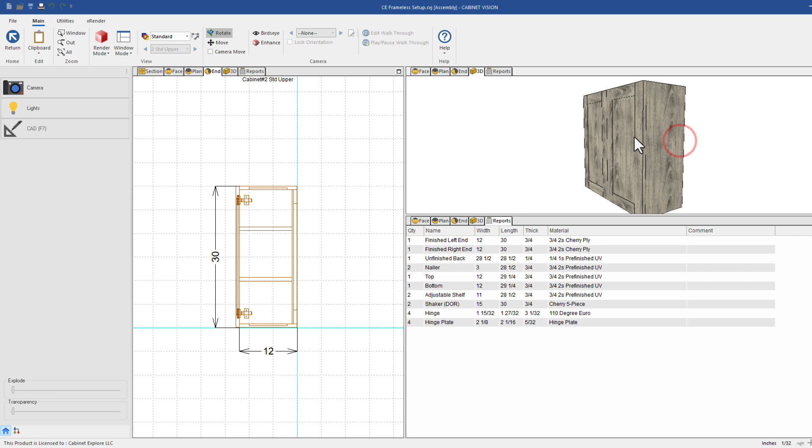Okay, in this video we're going to talk about line boring. I think this deserves a dedicated video because there's a couple different schools of thought on this, primarily two main options that people do. The first one is called bore by opening, and the second one is called bore required holes, basically like putting 5 holes per shelf instead of the full run of holes. So with what we've set up so far, we actually don't even have shelf holes yet. I want to show you how to set up the two options and show you the difference, so you can decide which way to start with.

So I'm going to do bore by opening first. Just like all the last couple videos, I'm going to go to room, cabinet, and modify for this room. This time I'm going to go to the operations tab. There's not a whole lot in here, but line boring is one thing we need to do. Right now it's set on no boring holes, which is not what we want, so let's do bore by opening first.

Bore by opening and bore all are very similar. Most times when people want full runs, they use bore by opening, not bore all. And like I said, bore required is where you pick a certain number of holes per shelf.

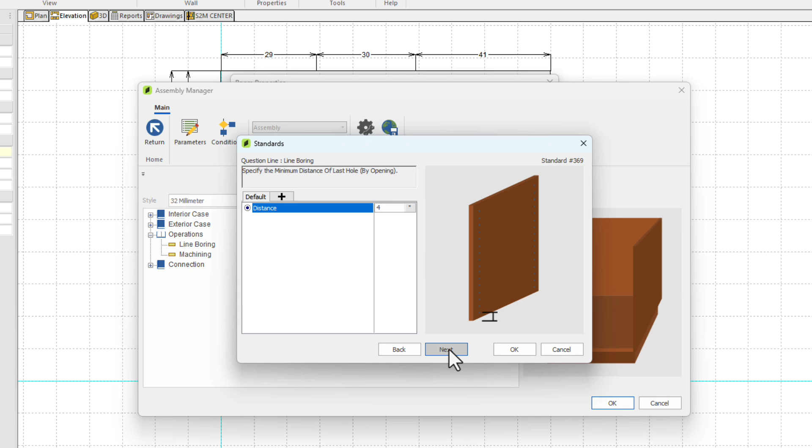So let's do bore by opening, and it's going to ask us a couple questions. Do we want to reference from the top or the bottom? I want to come from the bottom. Let's say I want 4 inches off the bottom, and minimum distance of last hole, let's just do 4 inches there too. You can equalize the distance, but I want it to be exactly 4 on the bottom. Fine, I'm just making some decisions as I go. Obviously you can make it whatever you need.

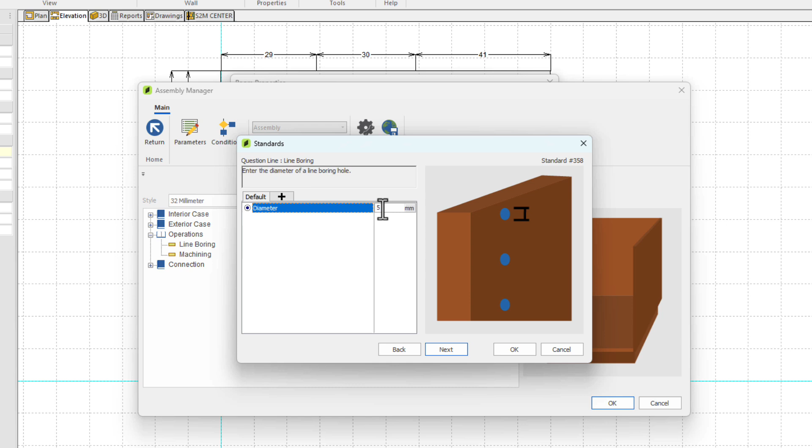Okay, diameter of the boring hole. Now I want to be careful here because I know this is 5 millimeters, but if I type that in, I'm in inches right now, and I can't click down here. So in the construction wizard, you'll see this little button that lets you swap between inches and millimeters. So I'll put 5 there. Now if I go back to inches, you see it converts it. You gotta be careful with the rounding, but if you type in 5 millimeters in this view, it's going to be perfect. The only reason it showed the rounded version is because of my setting. So we switch to millimeters, type in 5, and we're good to go.

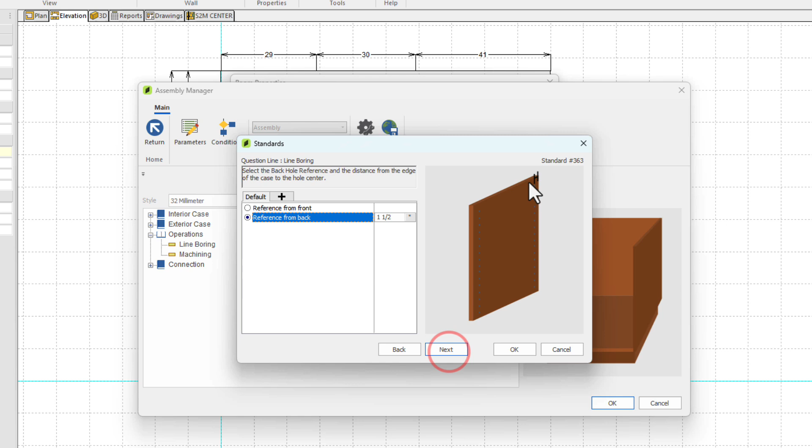On the depth, same thing, I'm gonna switch to millimeters and go 10. Now we got from the front, and then the next question will be from the back. I'm just gonna do 1.5 inches from the front. Be careful with this question because you don't want to reference them both from the front, or most people don't. You'd want to reference the front line of holes from the front, and the back line of holes would come from the back. There might be some situations where that's different, but for most people, reference the first line from the front and the back line from the back. I'm just going to make them the same. Then spacing, I'm going to go 32 millimeters. I'm not going to spend time on the middle holes, but you can see those questions there.

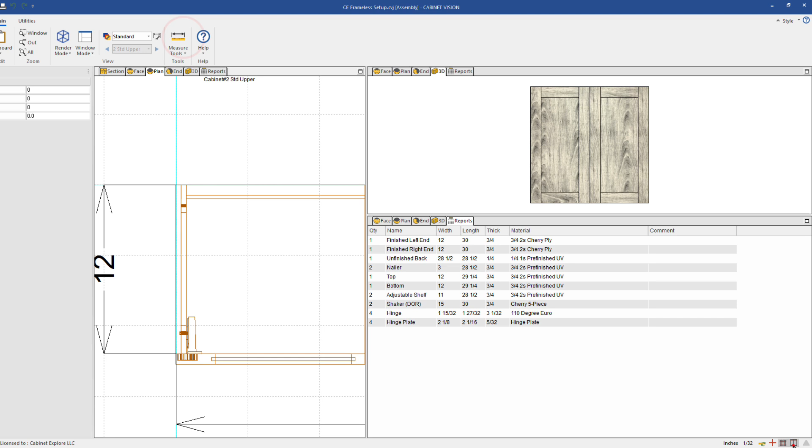Okay, so now we have our line of holes, and you can see that my 1.5 inch question is actually referring to the finished end. So I kind of wish it would be from the inside of the back, but you just have to compensate for that. Really, because my nailer and back combined are 1 inch, really I should have made the back distance like 2.5, which I'll just go do that real quick, just to show you the difference there. So we'll fly to that last question and go 2.5.

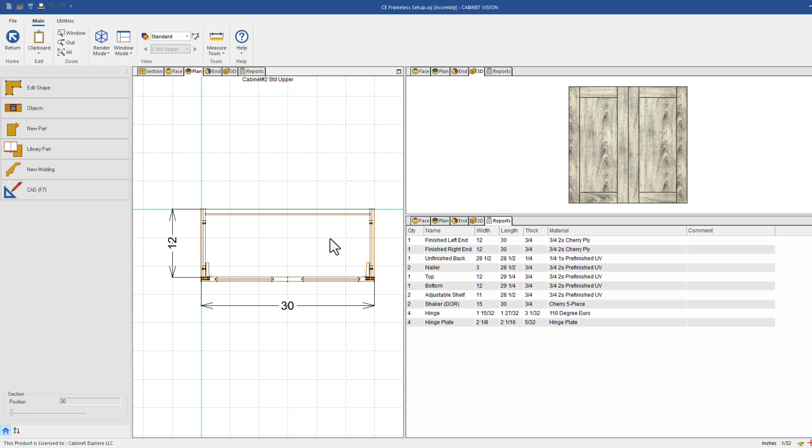You can also customize those settings at the cabinet level. For example, if you remove the back, you also have access to the boring section inside of the cabinet, and you can move the front and back setback. I know we're talking just global settings so far, but we're going to get a whole lot more into editing a cabinet.

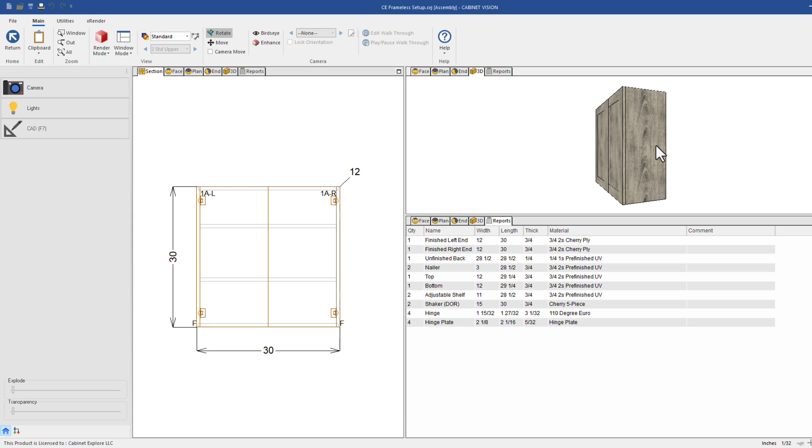Okay, so that's the bore by opening, and that works pretty well. I see that pretty commonly, especially with people who sell to dealers, and I think it's more predictable. If you're a custom builder, you can talk with the homeowner and figure out what goes in a cabinet and plan the openings. But what happens a lot of times, if you just do the 5 hole, somebody will want to move a shelf where there's no hole. But that's up to you on what you decide.

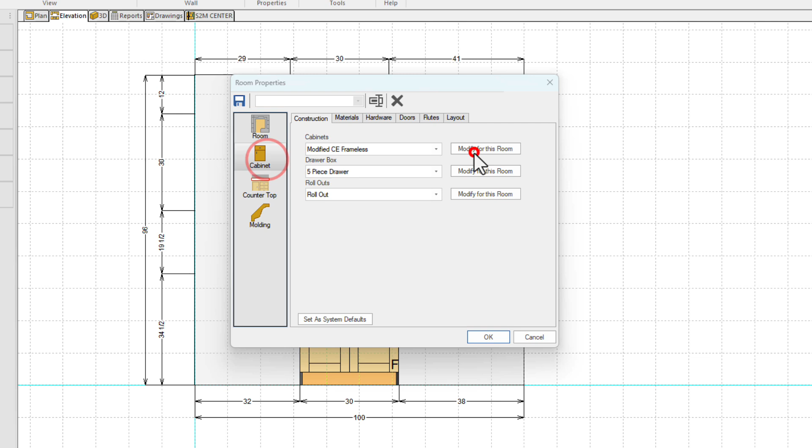Both options are viable. So now let's talk about how we do the bore per shelf, because there's one thing we have to do different for this. For bore by opening, we can do it all in the construction method. But when I switch to bore per shelf, I get one question, and that's it.

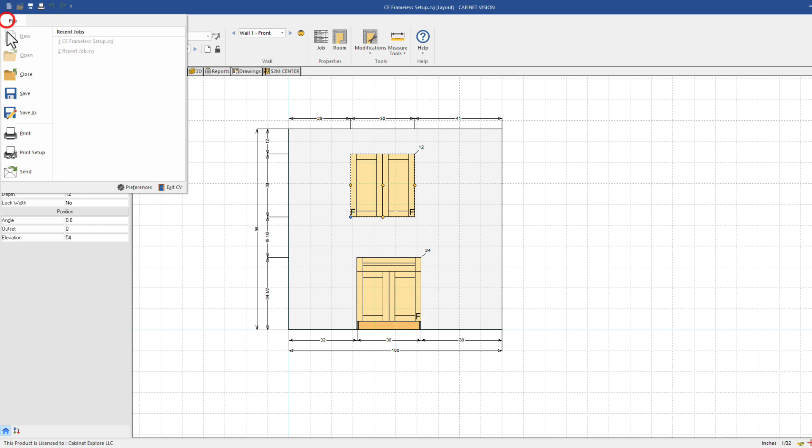And if we go look, there's nothing here yet. So I have to toggle that in the construction method, but what I also have to do is go back and create a connection specifically for my bore per shelf. So let's save this, close my job and save it, and we're going to go to connections.

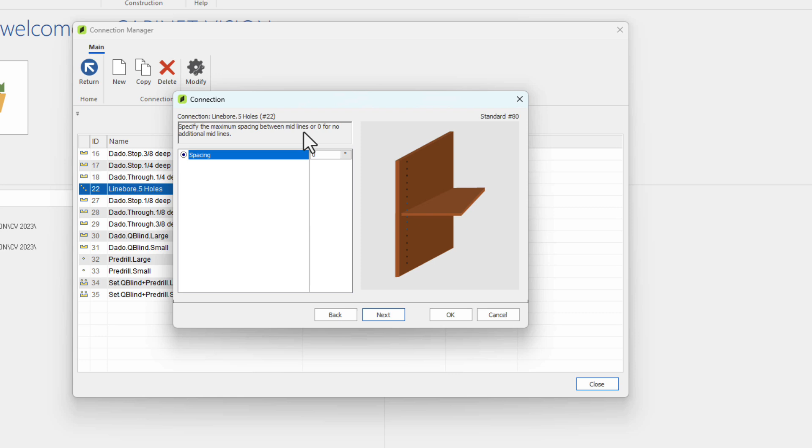When I was creating connections, I did create a line bore with 5 holes, and there's not a whole lot of questions here to ask, how much side clearance. It says bore required, and how many, and then you can control the front and back spacing. This time I'm going to put 1.5 inches and 1.5 inches, and let's put 32 millimeters spacing for the middle lines. 32mm spacing, and that's good.

And now, like I said, it doesn't have to be 5 holes. I could copy this and make a 7 hole or a 13 hole or whatever I want to make. So I'd copy that and just simply go update the quantity to 7. I like to get the description cleaned up, that way when I sort it, everything's perfect. So again, we can create multiple connections for these different setups.

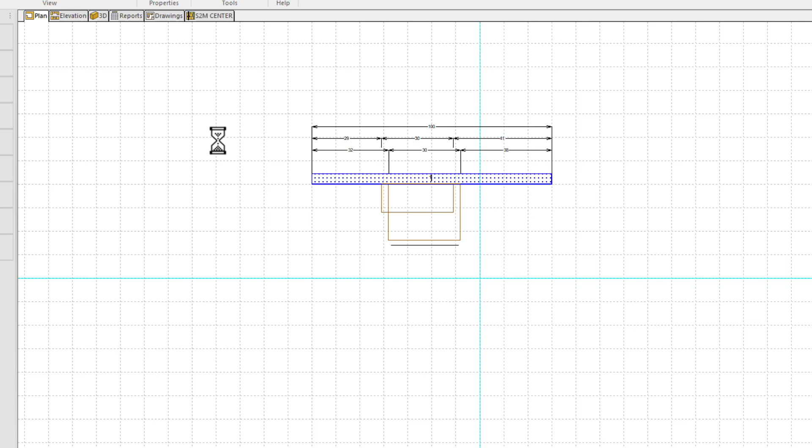But let's go back into our job, and I'll show you how to apply that connection so we can actually see that bore per shelf option. Back in the construction method, remember it's not in operations because we already chose everything we need to choose here. We go to connections, right, because it's a connection, and we go to adjustable shelves.

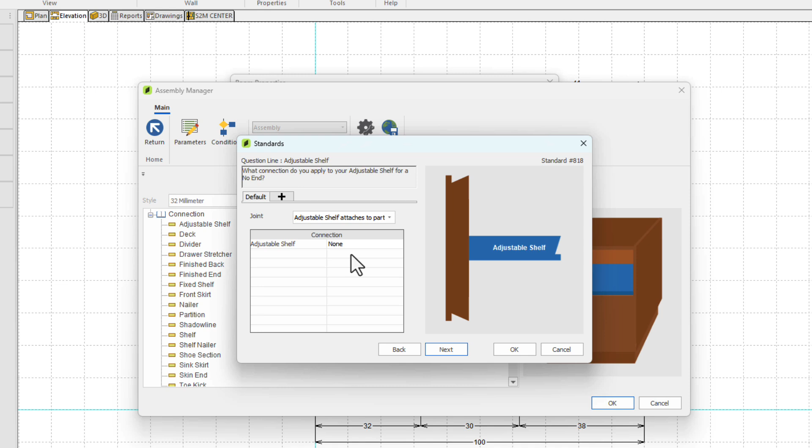So how does your adjustable shelf and finished end connect? Let's do 5 hole, skin end, unfinished end. I a lot of times just leave skin ends on none because I personally don't use them a whole lot, but if you're using skin, obviously you'd answer that question. Sub end, I'm just going to pick the same one here, and you can see you could obviously pick different connections here as needed. And then we'd also want to put it on our partitions and our dividers.

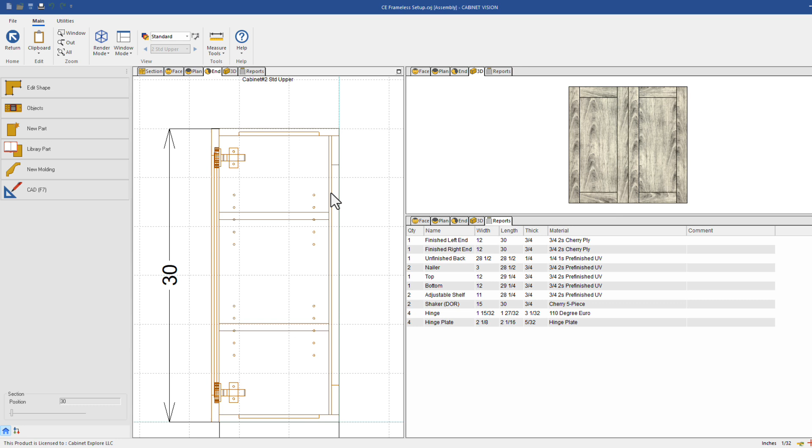Okay, now we should start seeing our holes. So here's what I'm talking about when I say bore per shelf. I really like this option if you can find a way to deal with the extra space, because overall it just feels smarter. The bore by opening was like attached to the end, so when you said reference from back, like we saw, it didn't really know where the shelf was. It was just in reference to the finished end or the unfinished end.

The other thing I really like about this method is if you happen to decrease a shelf, the holes will follow it. On bore by opening, the line bore would still be out here at the front. So, like I said, bore by opening is nice because you get that full run, and bore per shelf just feels smarter if you're a custom shop.

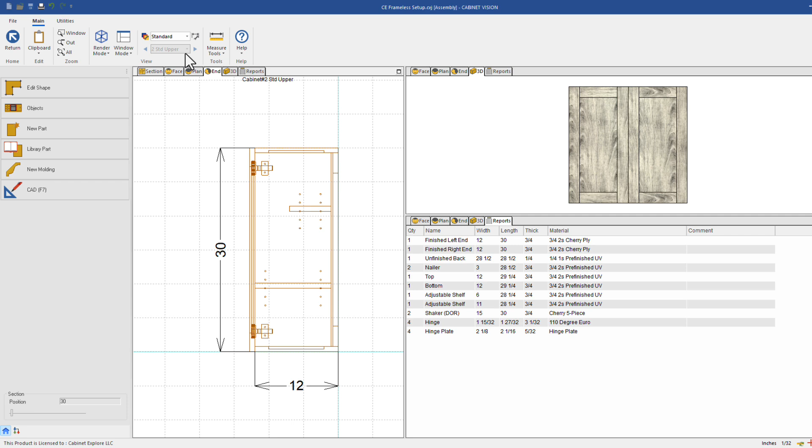So you kind of weigh the pros and cons and figure out what works for you. Some people just increase the number of holes so they can essentially get a continuous run, because if I would do more like 7 or 9 or 11 holes, I really wouldn't even have a gap anyways in most situations. So that's the 2 main options on the line bore, and I'm going to leave mine on bore per shelf because that's my personal favorite, but again, each shop has different needs. So that's all for this video.